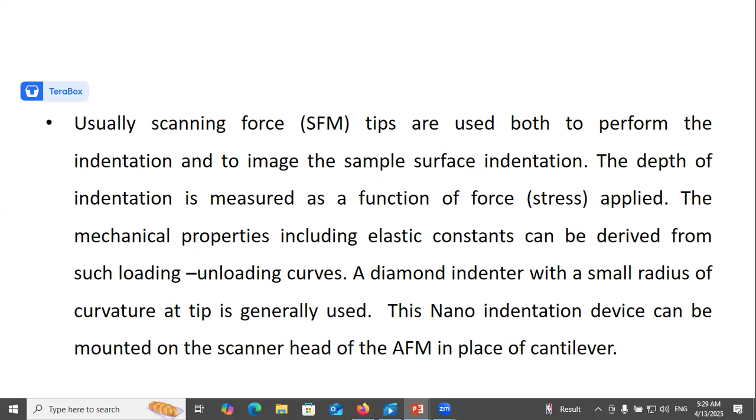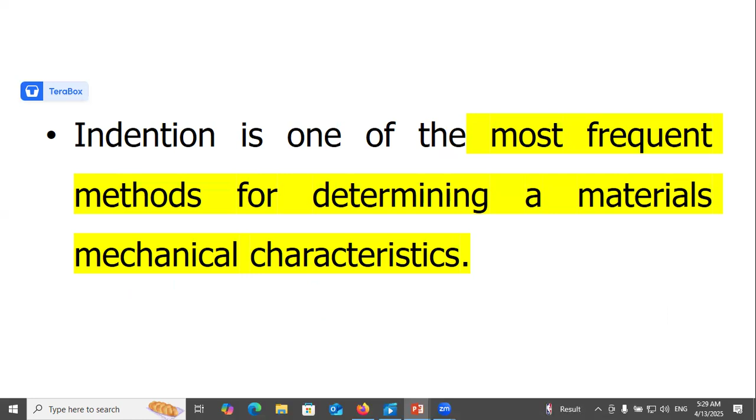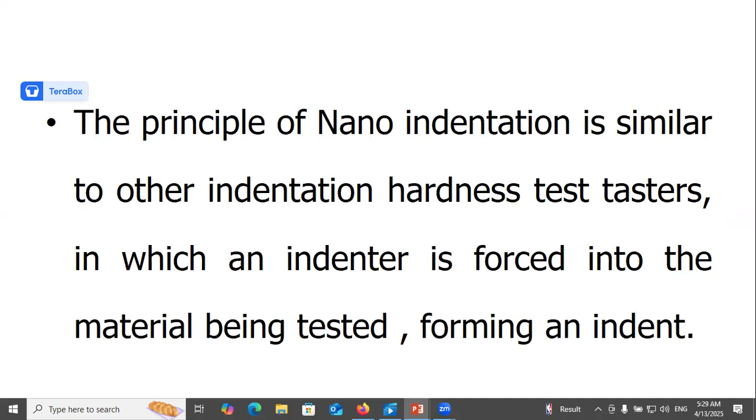We can also define nanoindentation as a type of mechanical indentation testing performed on a small scale. Indentation is one of the most frequent methods for determining a material's mechanical characteristics. Nanoindentation is a method for measuring the hardness, plasticity, and elasticity of minute quantities of materials. Its principle is similar to other indentation hardness testers, in which an indenter is forced into the material being tested, forming an indent.

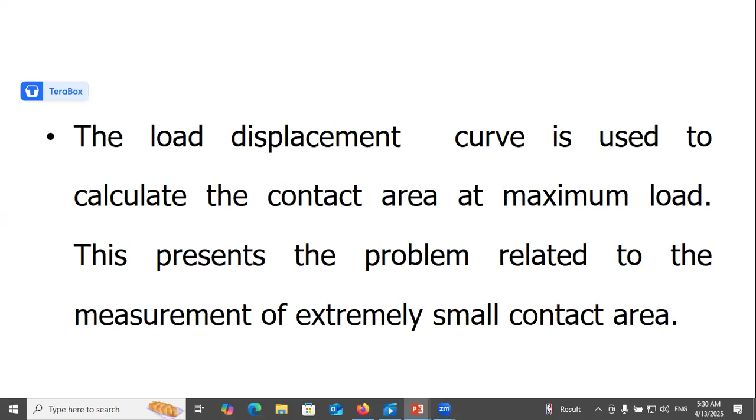The hardness is taken as the ratio of load to the area of contact between the sample and the indenter. During the test, both the load and the displacement of the indenter are recorded. The load-displacement curve is used to calculate the contact area at maximum load, which presents the problem related to measuring an extremely small contact area.

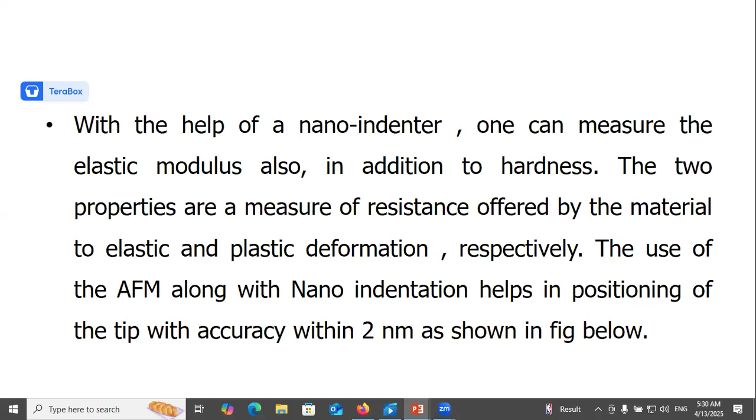With the help of the nanoindenter, one can also measure the elastic modulus. In addition to hardness, these two properties measure the resistance offered by the material to elastic and plastic deformation respectively. The use of the atomic force microscope along with nanoindentation helps in positioning the tip with accuracy within 2 nanometers, as shown in the figure below.

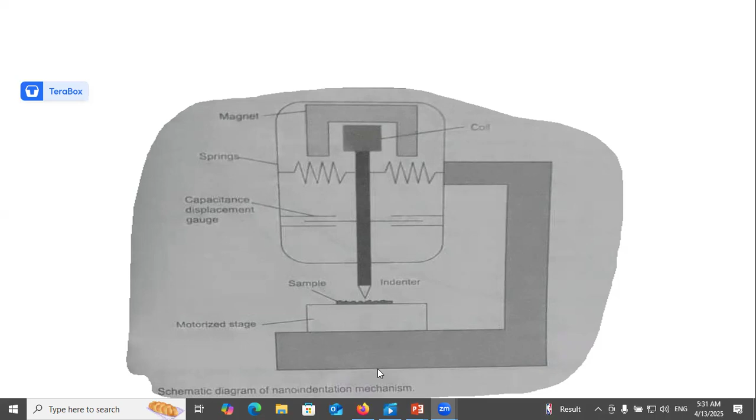Also, you can see the schematic diagram of the nanoindentation test. This is the indenter, the sample, and the load. Its associated load-depth compliance curve.

The curve shows three segments: loading, unloading, and hold.

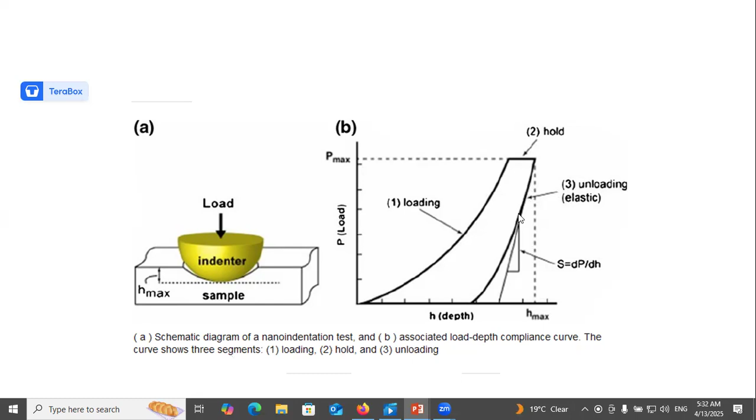In nanoindentation, small loads and tip sizes are used so that the indentation area may measure only a few square micrometers or even nanometers. Due to this, typical electron microscopy techniques may be utilized to image the indentation, but this can be quite cumbersome. This problem is generally overcome by using a high precision geometry, namely the Berkovich tip, which is a three-sided pyramid geometry.

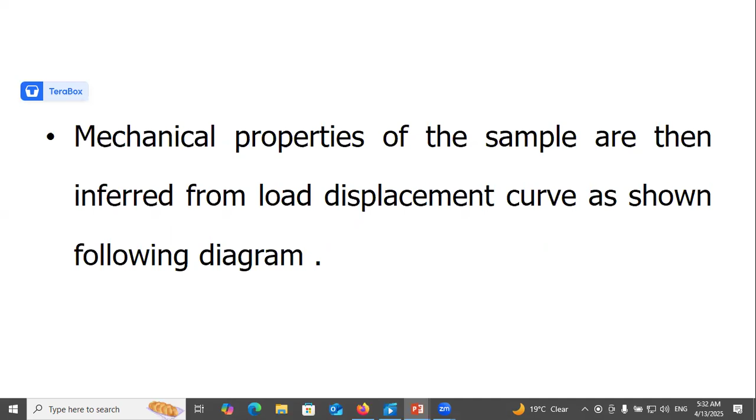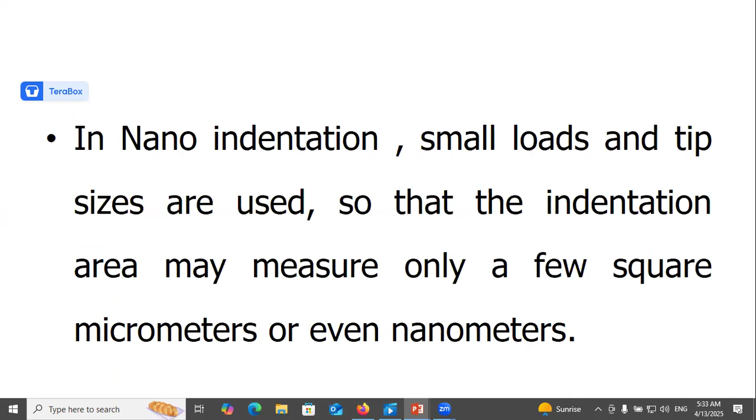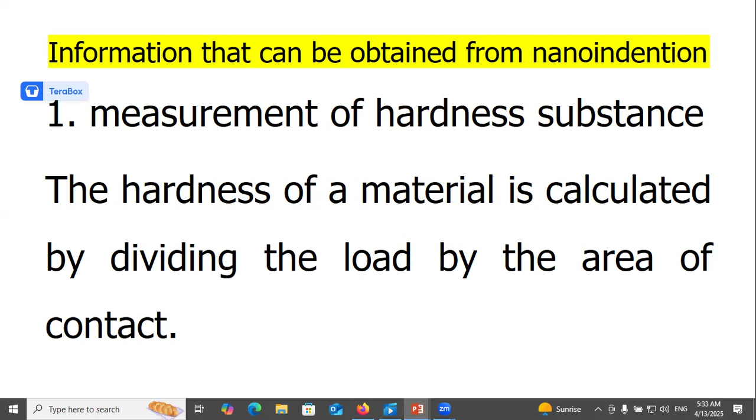Information that can be obtained from nanoindentation: measurement of hardness. The hardness of the material is calculated by dividing the load by the area of contact, where Pmax is the maximum applied load and A is the projected contact area.

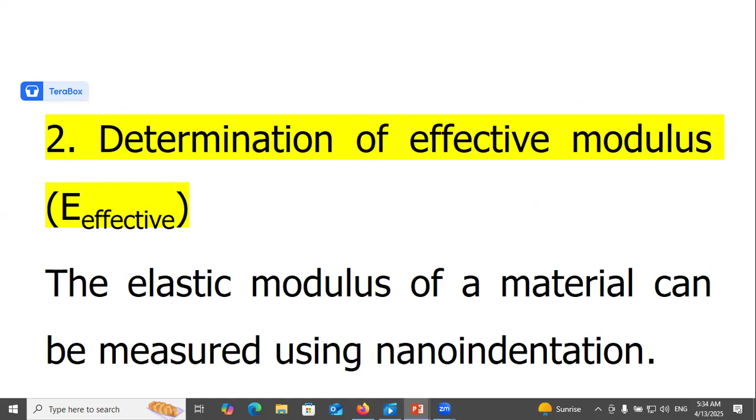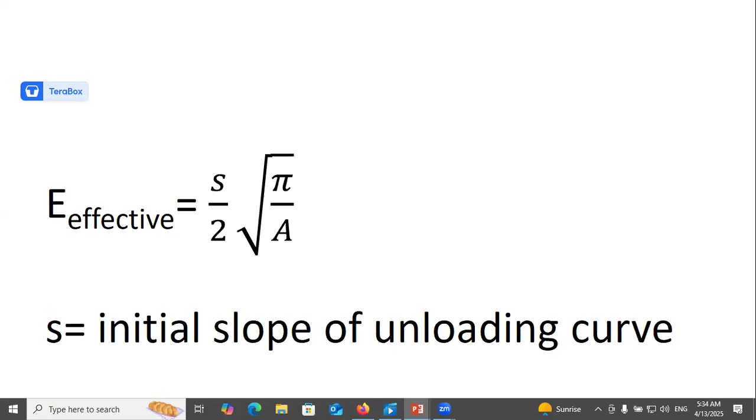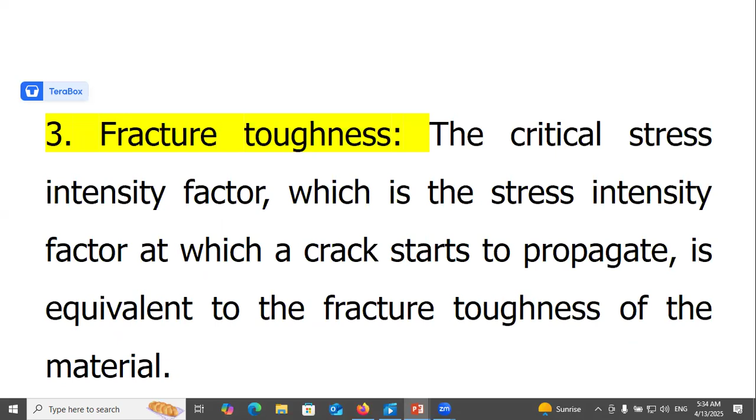Fracture toughness: the critical stress intensity factor, which is the stress intensity factor at which a crack starts to propagate, is equivalent to the fracture toughness of the material.

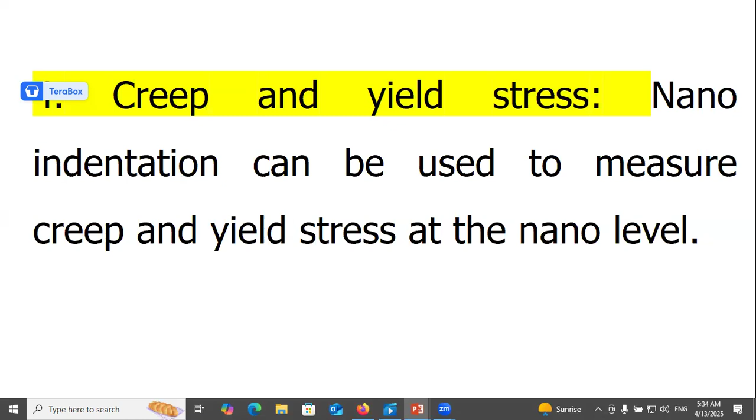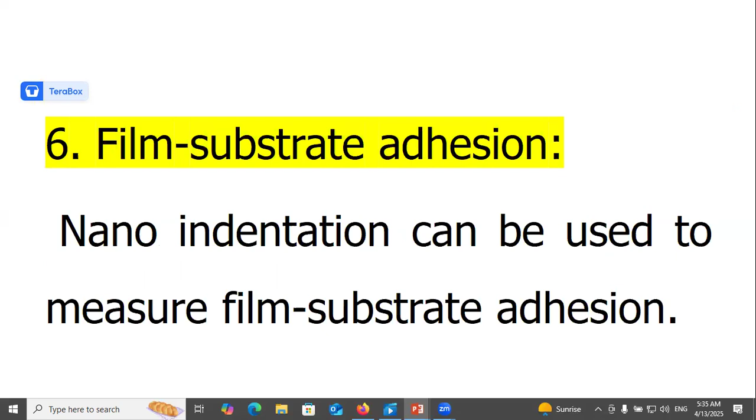Creep and yield stress: nanoindentation can be used to measure creep and yield stress at the nano level. Scratch and wear resistance: nanoindentation can be used to characterize the material's scratch and wear resistance. Film substrate adhesion: nanoindentation can be used to measure film substrate adhesion. Residual stress: nanoindentation can be used to measure residual stress.

Applications of nanoindentation: for thin films and coatings, it assesses hardness, modulus, and adhesion. In material science and engineering, modulus refers to a measure of the material's stiffness or resistance to deformation when subjected to stress.

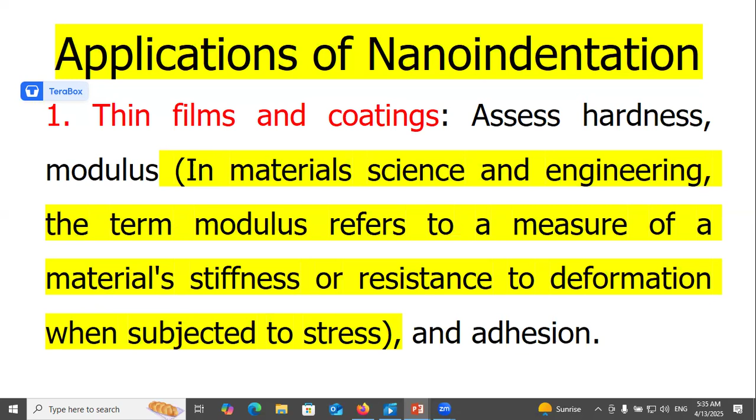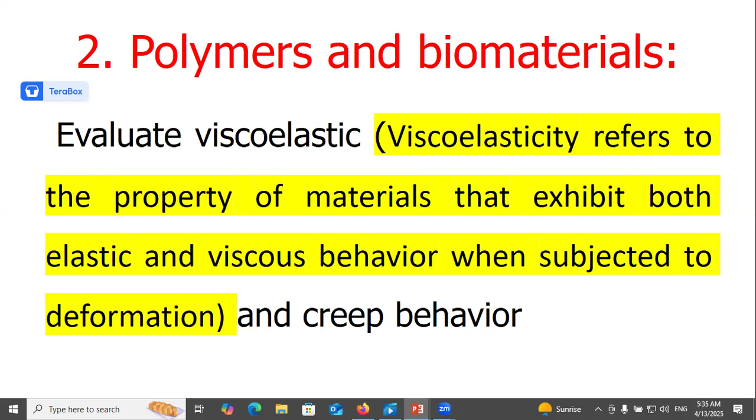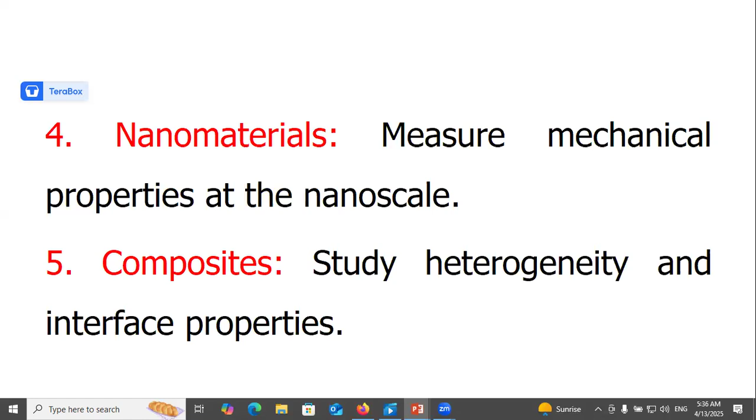For nanomaterials, it measures mechanical properties at the nanoscale. For composites, it studies heterogeneity and interface properties.

Okay, it's all about nanoindentation.